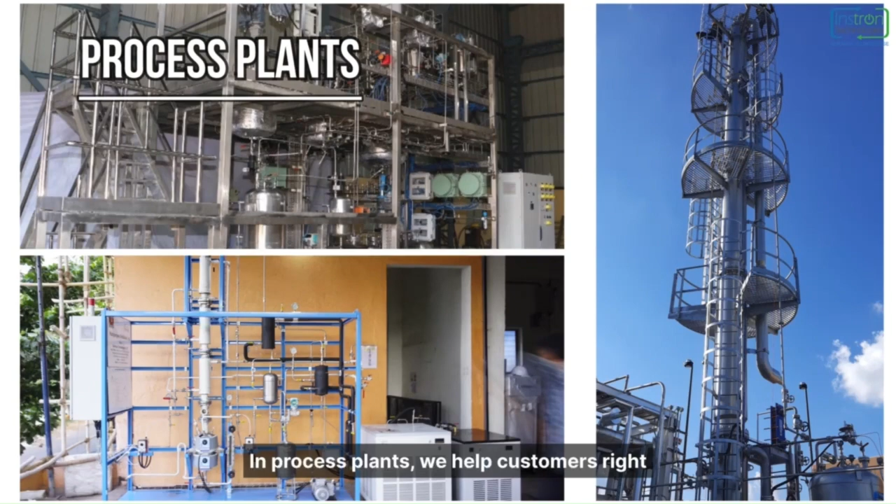Instron Technologies offers products and solutions in 3 verticals: process plants, digital factory solutions, and test bench systems. In process plants, we help customers right from conceptualization to detailed engineering and also complete plant supply and installation. In digital factory solutions, we help customers monitor their critical parameters on the go by offering systems right from sensors, communication with existing PLCs, and then giving authentic data to empower the decision makers.

And in test bench systems, we provide end-of-line and performance evaluation test benches for, say, electrical motors, appliances like refrigerators and ACs, and thrusters, etc. Our strength is our in-house expertise in automation, IT, chemical processes, and mechanical design. We leverage it to discover unmet customer needs and provide turnkey tailor-made solutions. Our solutions have helped clients to enhance their production and efficiency to achieve their sustainability goals.

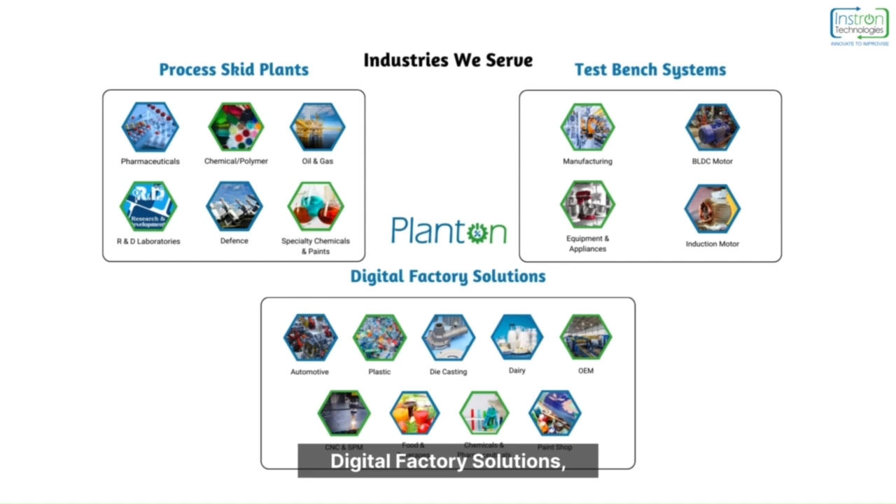Our mission at Instron Technologies is to continuously innovate and enhance operations for customers globally in the manufacturing industry, process industry, and research laboratories. Our vision is to become a recognized leader in specialized products and solutions, particularly in process plant systems, digital factory solutions, and test bench systems. We aspire to make substantial contributions to enhance productivity and efficiency for our customers.

We have been recognized as one of the 10 most promising industrial IoT solution providers. We are ISO certified, and we also got selected for the DRDO Technology Development Fund and iDEX initiative. With this, we look forward to expanding our presence in Canada, Australia, Sri Lanka, and Thailand. We have developed a young and dynamic core team and execution teams to help achieve the organizational goals. We strive to achieve the philosophy of growth at individual level and also at organization level. And because of this, we have leaders in our organization for day-to-day decisions.

I will continue. So we are talking about why Instron Technologies is a reliable partner because of the key strengths which we are delivering in the industry, because of our cross-domain expertise and automation integration capabilities. We also support our customers relentlessly, and we have more than 200 industrial solutions implemented worldwide. The most important part is we have a strong network of value partners with cross-domain expertise. This makes us a differentiator in the market.

So going ahead with the next slide. So here we want to showcase our industry-leading experience. So if you are able to see, one of the few cases I am just briefing here. So some of the key completed projects that demonstrate our expertise and experience. We successfully completed a project for motor test benches designed to handle motors ranging from 0.12 kW to 15 kW with 3 test benches. You can see it in the picture as well.

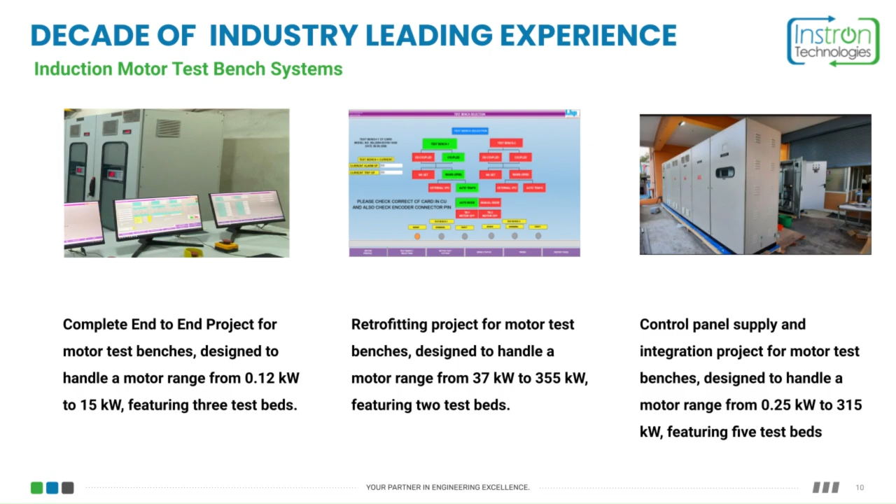Over to Milind. Thank you, Dhananjay, for helping the users to understand the background of the organization and its credibility, especially in motor test benches.

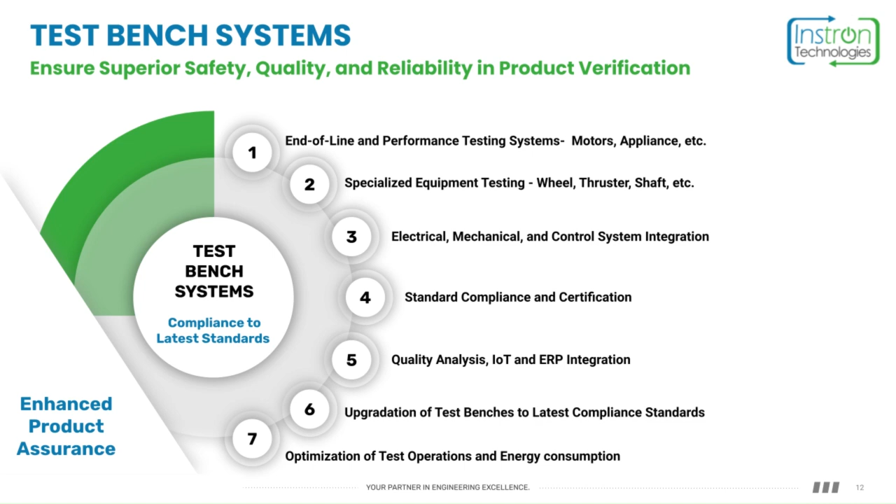Our main purpose of providing the test benches is to optimize the test operations, reduce energy consumption, and enhance the efficiency of the testing procedures. Let's talk about our one-stop turnkey solutions for electrical motor test benches.

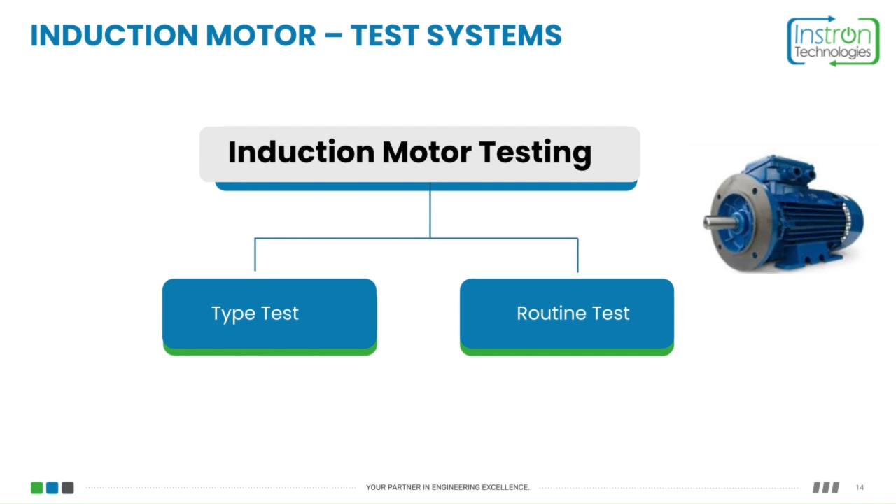So we provide test bench systems for type test as well as routine test of the motors. In type test, we try to validate the design specifications of the systems, and in routine test, we try to cover the operational analysis of the systems. Our systems facilitate comprehensive report generation, provide detailed analysis, and compare each motor's testing results with the design specifications to ensure quality. Test bench systems are compatible with both LT and HT types of induction motors,

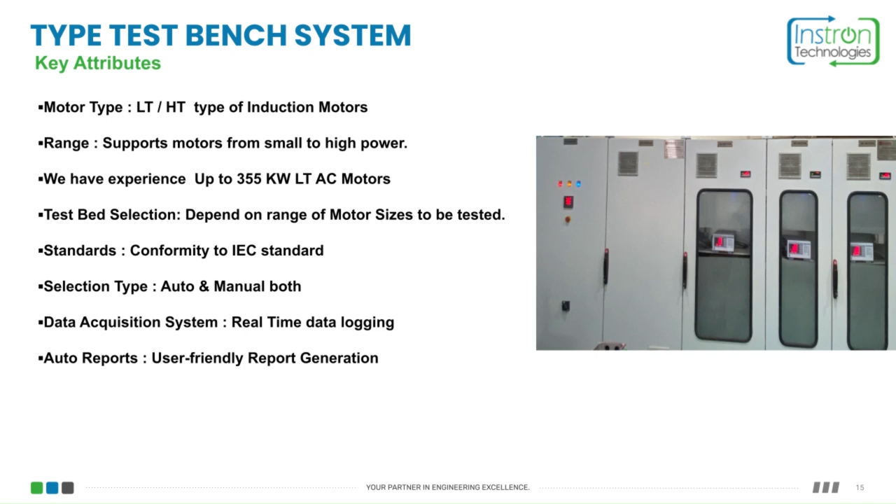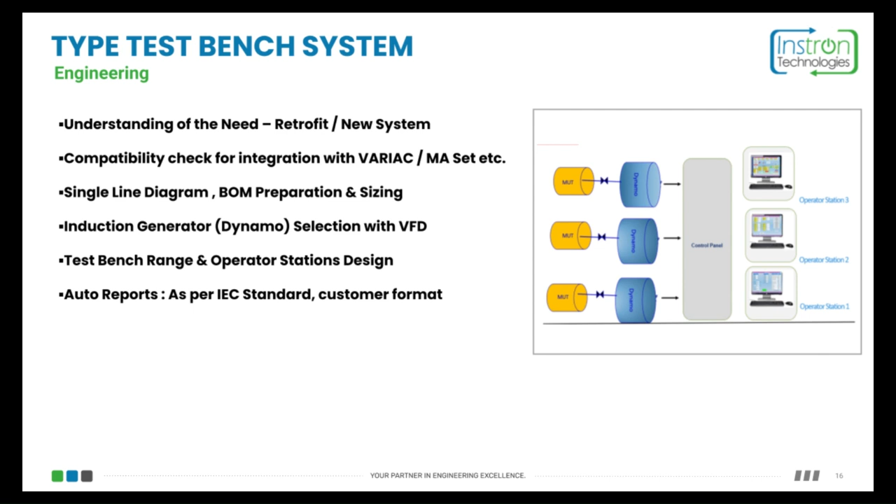We provide engineering design for the complete test benches, starting from understanding the requirements of the customers to evaluating their existing test bench systems and then providing them with a new or an upgraded option. We conduct a compatibility check to ensure seamless integration with the existing equipment such as variac, alternators, dynamometers, etc. Our detailed planning includes the preparation of electrical schematics, the bill of materials, and the sizing of the test benches.

We carefully select all the drives and the AFEs for the size and the test of the motors, which provides precise control. The design of the test bench, range, and operator stations is tailored to meet specific requirements. Additionally, our systems generate all kinds of reports and data analytics to conform with the IEC standards, and we also make custom reports to meet user-specific requirements.

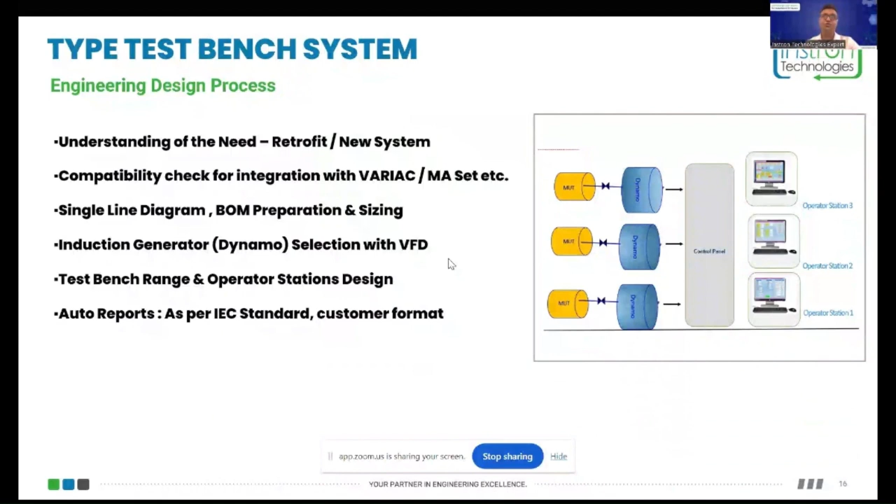Our test bench platform provides a wide range of test procedures that includes load curve, full load test, locked rotor, no load test in coupled and decoupled conditions, overcurrent test, dynamometer correction factors, temperature rise, hot resistance test. These rigorous procedures ensure that all aspects of motor performance are thoroughly evaluated, tested, documented and validated with the design results.

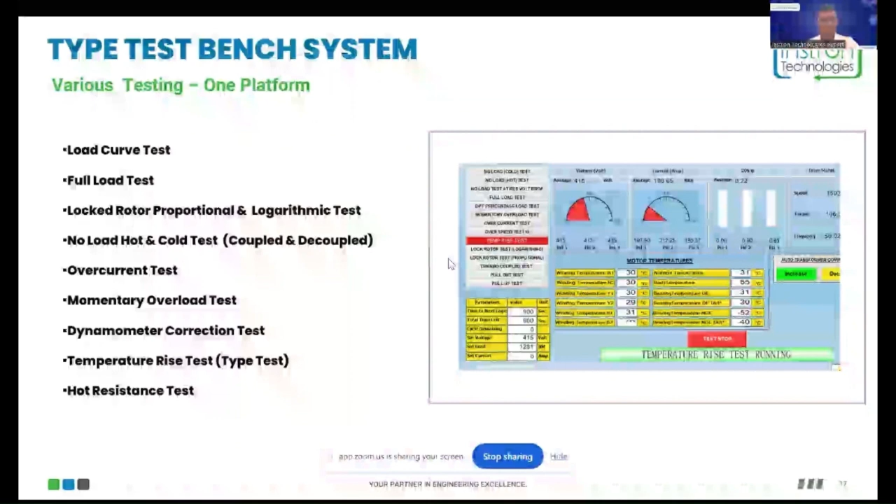Our motor test bench offers comprehensive and user-friendly report generation, making it a standout one-stop solution in the industry. With just one click, you could generate reports and compare different sizes of motors. This system automatically logs data for master reports and generates reports in Excel, PDF, or sends data to any ERP systems as required. We could also provide remote monitoring of the systems for third-party inspectors for the inspection of the motors.

Our most significant USP is we collaborate with the design team of the end users and embed these calculations in our systems to achieve the expected correlation coefficient and validate the design at the R&D stage. This helps in fast tracking the new design of the motors. To conclude, our test benches are designed to meet all your testing needs, ensuring superior quality, safety, and reliability of your products. Thank you for joining us today.

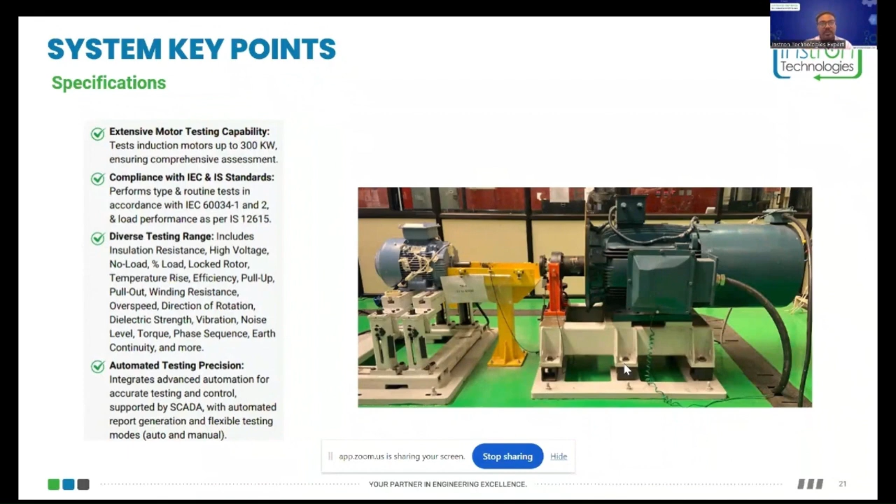And yes, automated testing precision: the precision and accuracy was requested around 0.1%. As far as the highest range like 355 kilowatt is concerned, we all agree that it might not be a big concern, but when we go to the 0.212 kilowatt for another customer, it becomes a concern. So we incorporated that successfully and we satisfied the requirement. So these were the specifications which were shared by this particular renowned manufacturer of electrical induction motors.

When we deep dive into that project, we come to know that there are certain challenges. So if I want to take you through those challenges, the customer already had some legacy equipment present on the site as far as the old test bench setup is concerned. So this particular requirement was integrating the old system with the new system and having a proper solution for a diversified range, so that all the motors which are manufactured on a daily basis can be tested in real world applications, or we can duplicate the real world scenario to test them under load and satisfy the requirement.

So the second challenge was enhanced precision and efficiency. As we discussed earlier, precision was requested around 0.1%, and as far as the RPMs for the motor for all kinds of pole types, a 2 RPM tolerance was considered. And as far as efficiency is concerned, whatever the operator was doing manually, the customer expected that efficiency should be improved, and if we're talking numbers, then from 5 motors they should be able to test 7 to 8 motors or 10 motors. So that efficiency was requested.

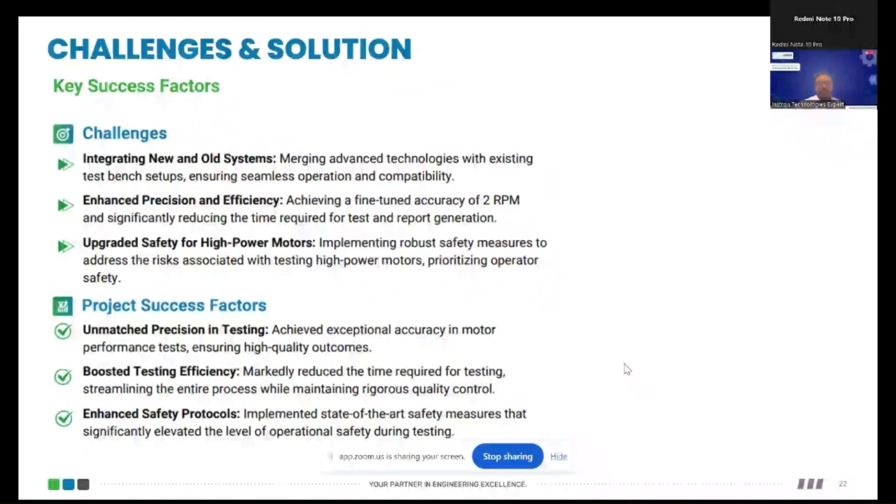So yeah, these were the challenges, and these are the project success factors with which we have successfully satisfied our customer. If we talk about benefits, whatever challenges and success factors we have discussed, we tried to accumulate in this table. So the test bench configuration: it was a single panel and a limited testing scope earlier because nothing was automated, everything was manual. But after implementation, it was a single panel and dual test bench setup, and it also increased the range of the motors and flexibility for the testing.

Capital expenditure and productivity: yeah, the higher operational cost has been reduced. So in a way, they can test more motors in a day, so that kind of capital expenditure and ROI has been taken care of.

Report generation: particularly, if we see the load curve calculations and correlation coefficient calculations, it was a tough job earlier for the operator. But when we came in and captured the exact data from the equilibrium state of the motor, it was a hassle-free operation for the operator, so that he can focus more on analyzing the data instead of doing the documentation manually.

Then error rate and accuracy: we all agree that there might be some manual errors while taking the data while the test is running. So we tried to capture data only from the equilibrium state and not before or after that. So we successfully achieved that state and locked the correct data.

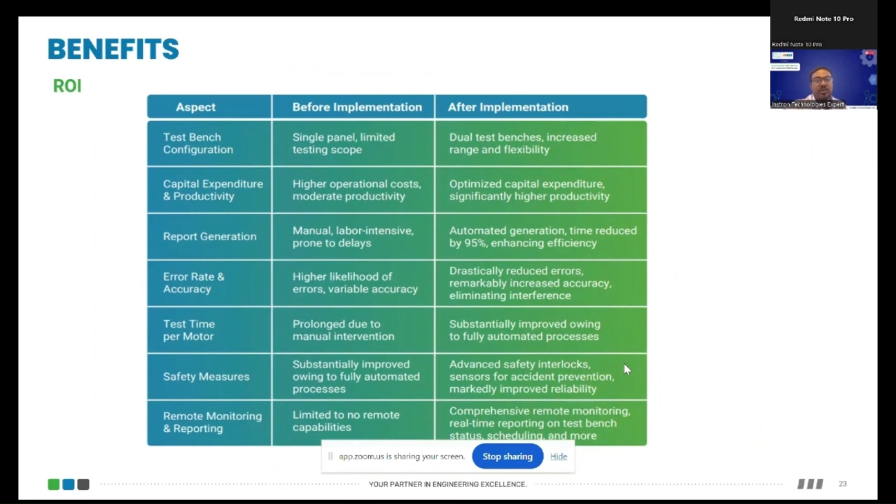Yeah. Thank you, Rahul and Pawan, for helping the users understand the types and specifications of the motors, test benches, and how your organization has helped customers through relevant case studies. Now, the most interesting part of this webinar is the test benches for advanced motors powering electric vehicles.

Our next speaker comes from iASYS Technology Solutions Private Limited, Pune. For more than 25 years, iASYS has been serving the automotive industry with a strong record of over 550 systems installations covering engine, vehicle and component testing and automation systems worldwide, leveraging innovations in system integration, data and facility management, EV and fuel cell electrolyzer testing technologies. iASYS products are used in the product validation and verification process of complex engineered products.

I would like to introduce our esteemed speaker, Mr. Rutuj Undale, Senior Engineer, iASYS. Rutuj holds a master's degree in automotive engineering from Coventry University, UK. As a senior engineer at iASYS Technology Solutions, he specializes in developing advanced EV technology solutions, including motor, powertrain, and vehicle testing, with expertise in transmission, e-axle, battery, and motor emulators. Additionally, he is well versed with European and global emission standards, effectively integrating regulatory compliance into automotive testing protocols. Over to you, Rutuj.

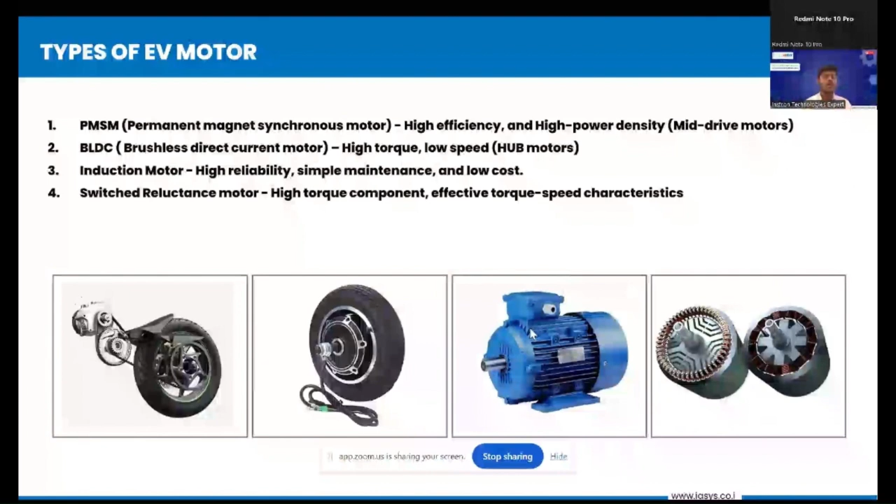So the benefits of motor testing. The first one will be to ensure the proper performance on the speed and torque to validate the design of the EV motor. So in this, majorly the manufacturer checks, for whatever motor has been designed, the performance and the speed-torque characteristics. These tests are taken on the performance basis and the torque and speed basis. Next one is the complete efficiency check as per the requirement from the mechanical and the electrical point of view.

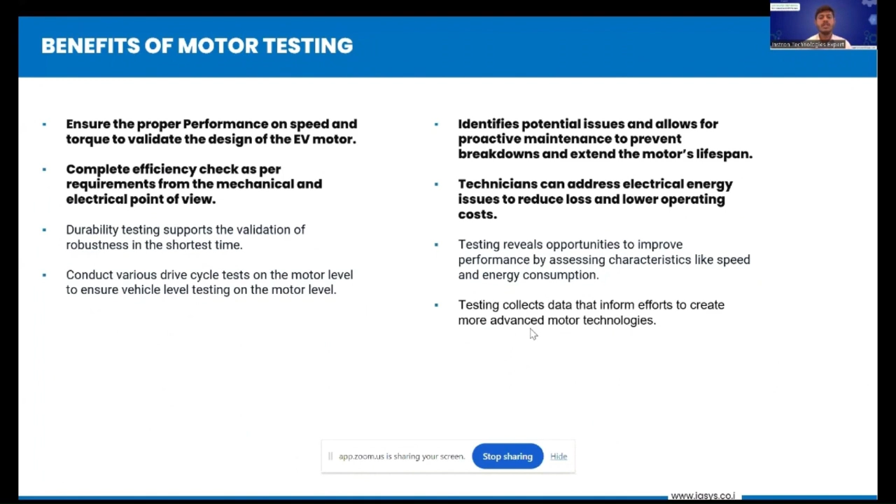Now let's see the basic architecture of the motor testing lab or the motor test bench. So as you can see, yeah, sorry for the glitch.

So as you can see in the PPT, this is the simple architecture of the motor testing assembly, where you can see the major components. We can go one by one. The first one on the right corner is the dyno, which is the dynamometer.

It is used to load the vehicle motor or the testing motor to check the performance of the system. Okay, so to drive that dyno, we need a drive panel, which is a VFD, which is a variable frequency drive. So that is another major component in this entire system.

So apart from that, to power the vehicle motor, we have to use a battery or a power supply, which is being used in this setup, called a DC power supply, which acts as a battery to give the power to the motor.

Apart from that, to measure your electrical characteristics, we have an electrical sensor known as a power analyzer, which is being used. So depending upon the motor type, we can use various numbers of channels, starting from 3-channel, 4-channel, up to 8 and 16 channel power analyzers with the help of current sensors.

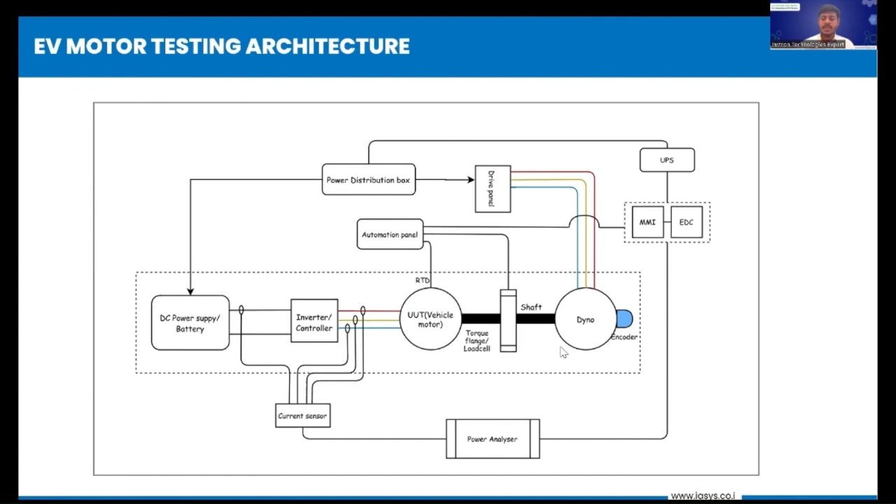So these are some pictures to give some idea about the major components. Right from the first photo, you can see the power analyzer, which is an 8-channel or a 4-channel power analyzer. So depending upon your motor type, these devices can be selected. The other one is the DC supply, which gives current and voltage to your EV motor.

So to check the voltage, current, and electrical parameters, we have current sensors, where there are 2 types of current sensors you can see. The first one is the pass-through current sensor and another is the clamp. So depending upon the application and your requirement, we can select whatever sensors you require.

The next one is the thermal chamber. This is actually an optional one for the manufacturer. So if the motor manufacturer wants to test their motors at certain humidity levels or certain temperature levels, this chamber can be used just for the motor itself.

So another part is the torque sensor, which is a critical part of this entire system, because until you get the torque and the speed of the system, you cannot ensure the performance of that complete test system. So the torque sensor is another important part, and the next one is the dynamometer, which is the load system. So this provides the loading to the EV motors, where we perform the transient test cycles depending upon whatever inputs we have given.

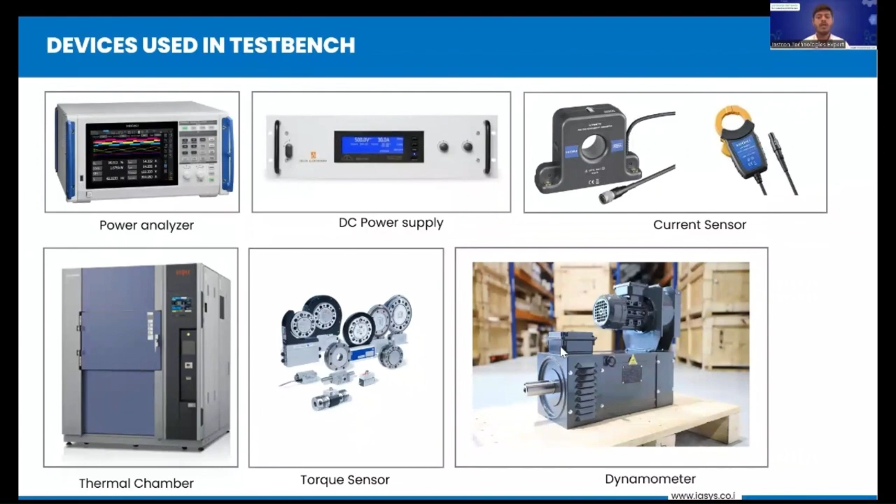Coming to the next slide is the test automation and the data acquisition system. So rightly, as I said before, it is known as the brain of the system. So Orbit EV control system, which is an iASYS-developed platform, is being used to control these test types. So you can see it is a flexible platform. So there are n number of devices used in this complete test architecture.

So to see the test data or the devices' data, we have to integrate those devices with the test system. So our platform ensures flexible integration with all the devices and hardware equipment to see the data during the testing. The test cycle which we run on the automation system gives you the entire test data, where you can see the graph on the side, which is the RLS test.

So to control and perform this test cycle, we need to program it according to the requirement of the speed and torque. So including the speed and torque, we can generate any type of test cycle during the testing. So once the test cycle is conducted, the report can be generated in any required format as per the customer's requirement, which ensures whatever testing you have done is on the mark or up to your requirement or not.

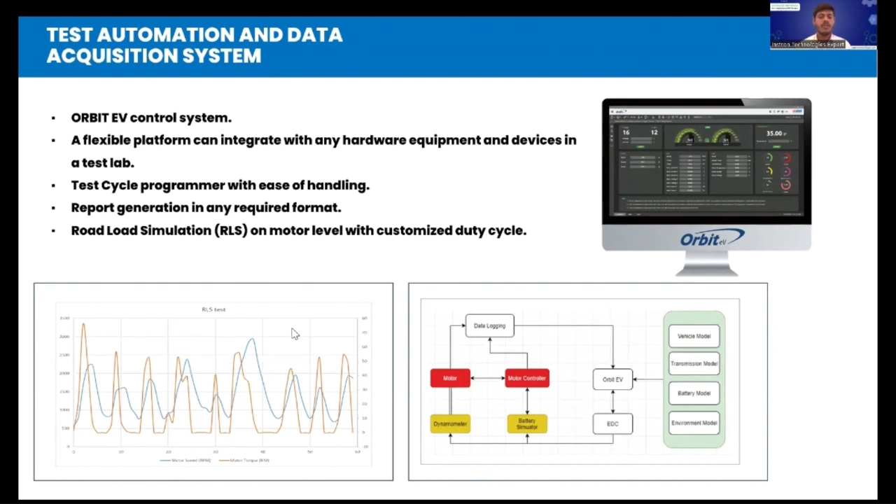So these are some test types and test standards we can go through. The first is the measurement of total loss and total efficiency. The main standard that has been released is ISO 21782-2:2019. This standard ensures complete testing and complete efficiency measurement. It includes all these tests with the complete test procedures and the report generation format, so we can refer to that standard for all these test cycles.

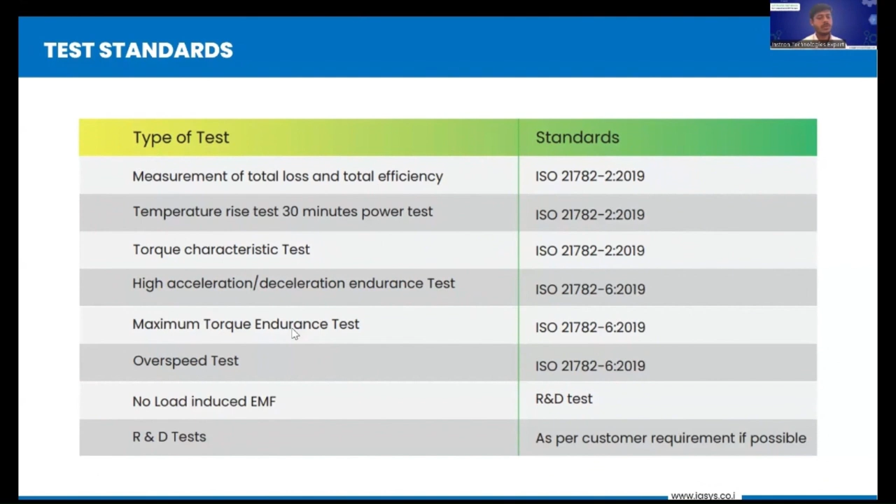There we have a temperature rise test, torque characteristics, high acceleration deceleration test, maximum torque endurance test, and overspeed test. iASYS has developed a containerized test solution, where you can have an entire test system in a single container. You can see a dynamometer, induction motor, controller, and the control room with the automation system, developed entirely in-house. These systems are available on a rental basis as well.

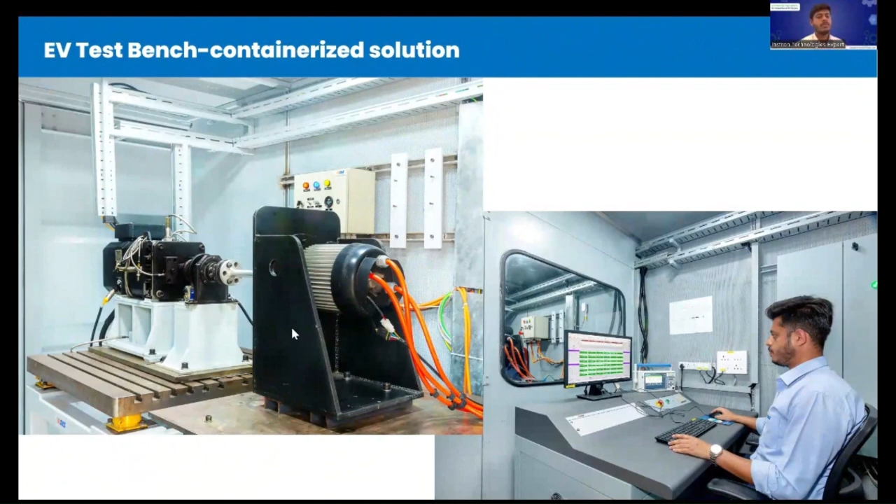Because in the startup culture, not many startup companies are able to invest such a huge amount in this test bench. So we offer the entire solution we have in-house to them to check whether the performance of their motor is good or not. It's an initial step, you can say, to help this ecosystem and the EV startup companies.

Talking about iASYS, the major strength is our 25 years of experience in this complete ecosystem, which makes us highly customer centric and gives control over the test systems. The solution-based approach depends upon the product and the project: where the customer faces a challenge, we are there with whatever solution, might be customized, might be standard. We are always there to work with the customer as their partner.

The major in-house competency is engineering, in which we have the mechatronics department, separate electrical and mechanical design, integration, test automation, real-time control, embedded, and communication of the devices. Beyond engineering, we have our own software team which develops our own software platform and products.